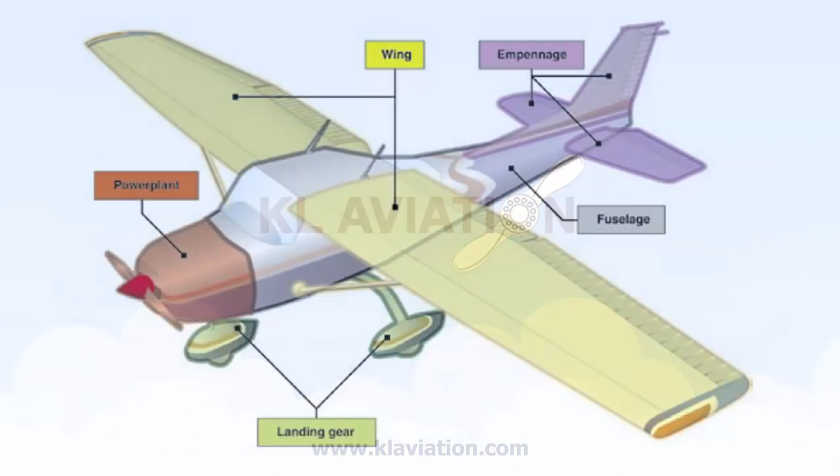In this video, we'll look at the major components of an aircraft. Although airplanes are designed for a variety of purposes, nearly all of them have the same major components, including the fuselage, wings, empennage, landing gear, and a powerplant.

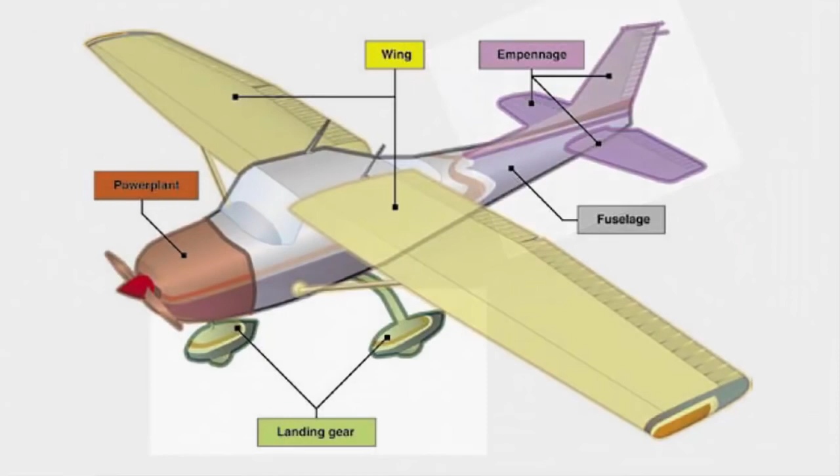The fuselage is the central body of an airplane and is designed to accommodate the crew, passengers, and cargo. It also provides the structural connection for the wings and tail assembly.

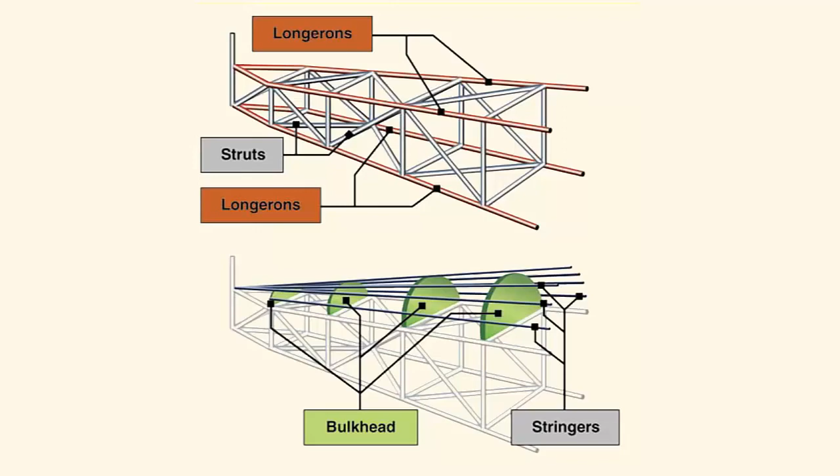Many older aircraft designs utilize an open truss structure constructed of wood, steel, or aluminum tubing. The most common types of fuselage structures used in today's aircraft are the monocoque, which is French for single shell, and semi-monocoque designs. We'll talk about these design structures in a later video.

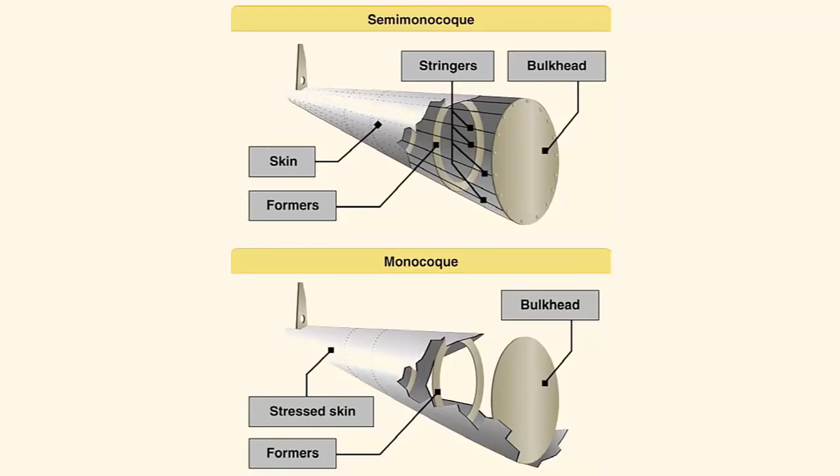Wings are airfoils normally attached to each side of the fuselage and are the main lifting surfaces that support the airplane in flight. There are numerous wing designs, sizes, and shapes used by aircraft manufacturers. Each design fulfills a certain need with respect to the performance required of the airplane. We will discuss how the wing produces lift in a later video all about aerodynamics.

Wings may be attached to the top, middle, or lower portion of the fuselage. These designs are referred to as high, mid, or low wing. The number of wings can also vary. Airplanes with a single set of wings are referred to as monoplanes, while those with two sets are called biplanes.

Many high-wing airplanes have external braces or wing struts which help to spread the loading to the fuselage for additional support. Since wing struts are usually attached approximately halfway out on the wing, this type of wing structure is called semi-cantilever. A few high-wing and most low-wing airplanes have what's called full cantilever wing, designed to carry the loads without external struts.

The principal structural parts of the wing are spars, ribs, and stringers. These are reinforced by trusses, I-beams, tubing, or other devices, including the skin of the wing. The wing ribs determine the shape and thickness of the wing.

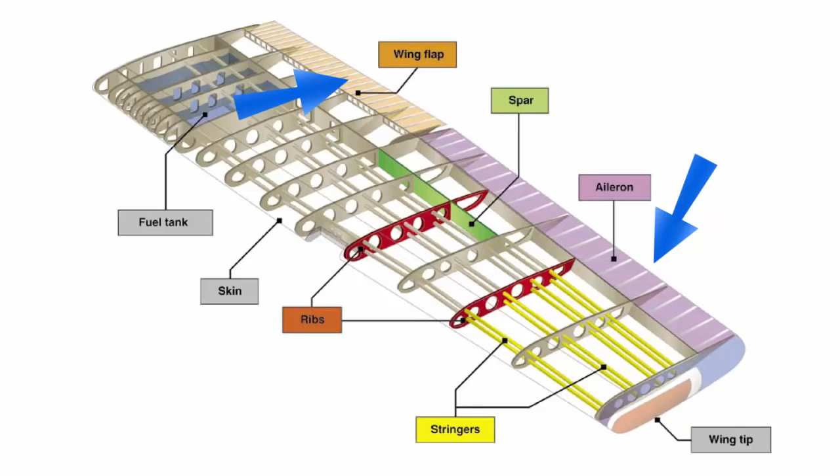The empennage includes the entire tail group and consists of the vertical stabilizer, the horizontal stabilizer, the rudder, elevator, and one or more trim tabs.

The rudder is attached to the back of the vertical stabilizer. During flight, it is used to move the airplane's nose left and right. The elevator, which is attached to the back of the horizontal stabilizer, is used to move the nose of the airplane up and down during flight.

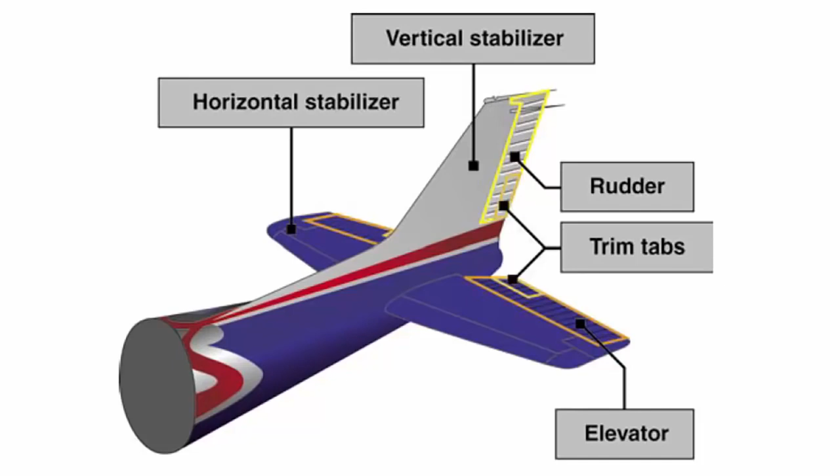The trim tabs are small, movable portions of the trailing edge of the control surface. These movable trim tabs are controlled by the pilot to reduce control pressures during flight. Trim tabs may be installed on the ailerons, rudder, or elevator.

A second type of empennage design does not require an elevator. Instead, it incorporates a one-piece horizontal stabilizer that pivots from a central hinge. This type of design is called a stabilator and is moved using the control wheel just as the elevator is moved.

For example, when a pilot pulls back on the control wheel, the stabilator pivots so the trailing edge moves up. This causes the nose of the airplane to move up.

Instead of a trim tab, stabilators have an anti-servo tab extending across their trailing edge. The anti-servo tab moves in the same direction as the trailing edge of the stabilator and helps make the stabilator less sensitive.

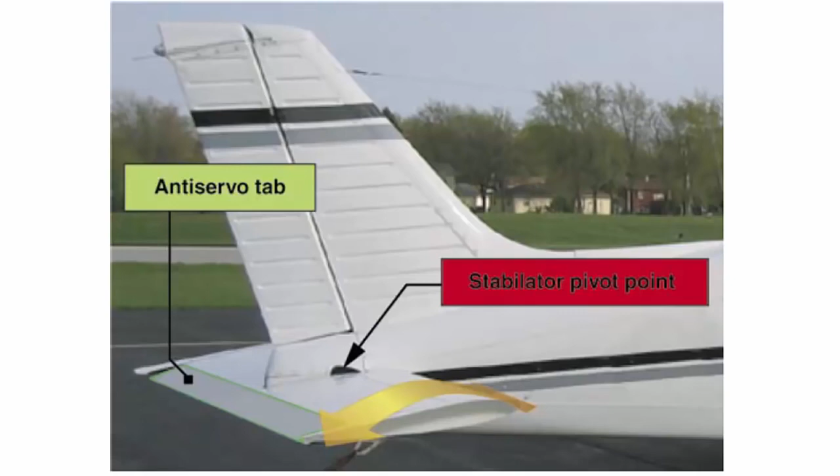The anti-servo tab also functions as a trim tab to relieve control pressures and helps maintain the stabilator in the desired position.

The landing gear is the principal support of the airplane when operating on the ground, taking off, or landing. The most common type of landing gear consists of wheels, but airplanes can also be equipped with floats for water operations or skis for landing on snow.

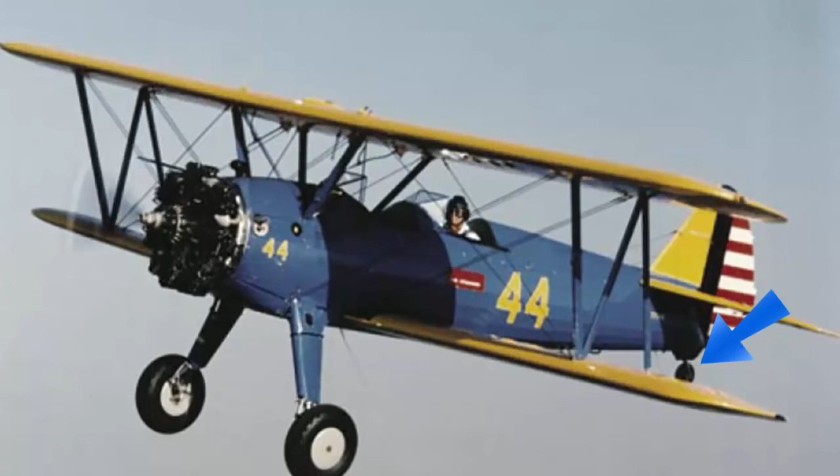The landing gear consists of 3 wheels: 2 main wheels, and a third wheel positioned at either the front or rear of the airplane. A landing gear configuration with a rear-mounted wheel is called a conventional landing gear. Airplanes with conventional landing gear are sometimes referred to as tailwheel or taildragger airplanes.

When the third wheel is located on the nose, it's called a nose wheel, and the design is referred to as a tricycle gear. A steerable nose wheel or tail wheel allows the airplane to be controlled while on the ground. Most aircraft are steered by moving the rudder pedals, whether nose wheel or tail wheel.

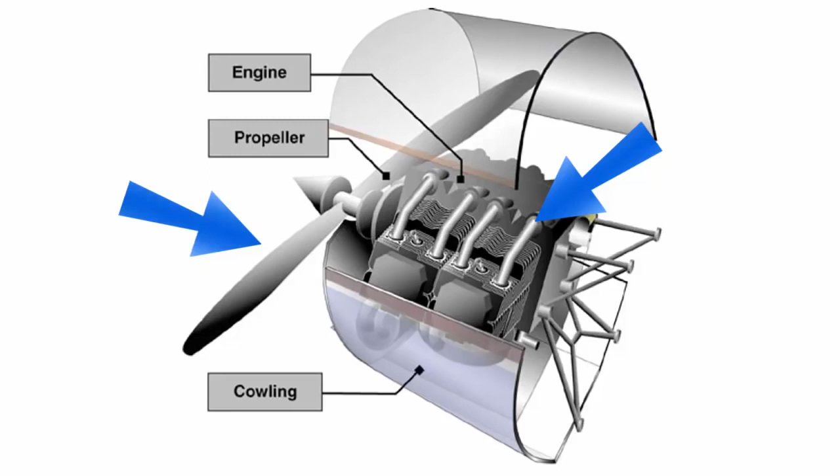The power plant usually includes both the engine and the propeller. The primary function of the engine is to provide power to turn the propeller. It also generates electrical power, provides a vacuum source for some flight instruments, and in most single-engine aircraft provides a source of heat for the pilot and passengers.

The engine is either covered by a cowling or a nacelle. The purpose of the cowling or nacelle is to streamline the flow of air around the engine and to help cool the engine by ducting air around the cylinders.

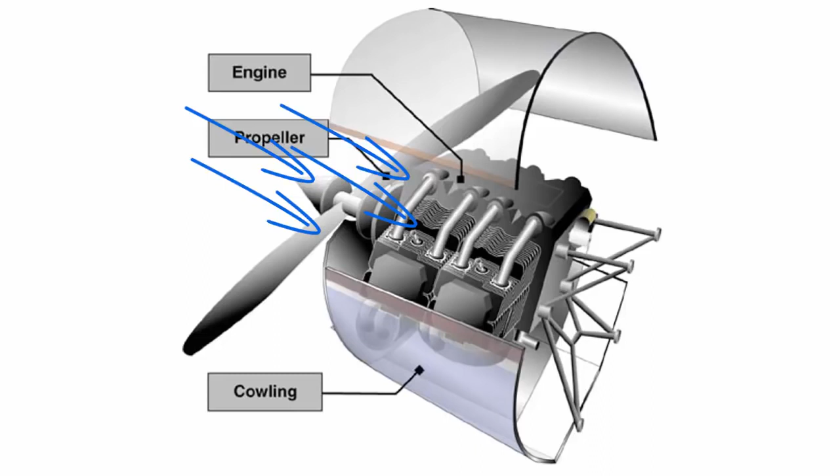The propeller, mounted on the front of the engine, translates the rotating force of the engine into thrust. As you will recall from the previous video, thrust is a forward-acting aerodynamic force that helps move the airplane through the air. The propeller may also be mounted on the rear of the engine, which is called a pusher-type aircraft.

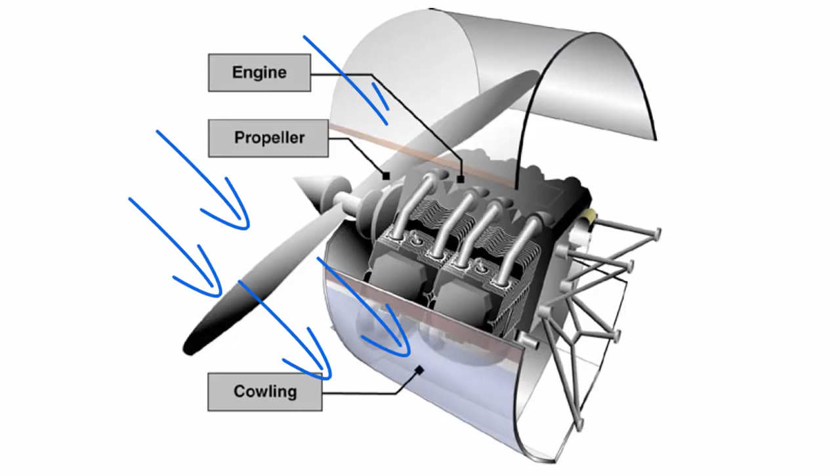A propeller is a rotating airfoil that produces thrust through aerodynamic action. A low-pressure area is formed at the back of the propeller's airfoil, and a high pressure is produced at the face of the propeller, similar to the way lift is generated by an airfoil used as a lifting surface or wing. This pressure differential pulls air through the propeller, which in turn pulls the airplane forward.

Propellers are usually matched to a specific aircraft and power plant combination to achieve the best efficiency at a particular power setting, and they pull or push depending on how the engine is mounted.